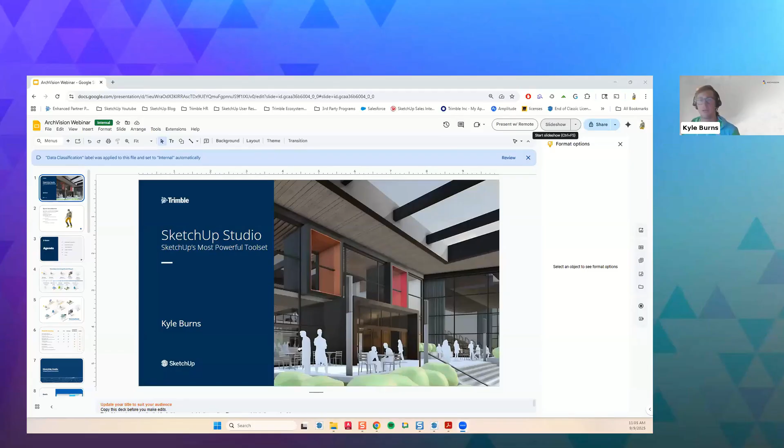Today we are going to talk about SketchUp Studio, SketchUp's most powerful tool set.

Just another quick introduction about myself and why I am speaking to you today. My name is Kyle Burns, and I'm a customer success manager here at SketchUp. I support all of our government customers and our West Coast key accounts, where I am located in Central Oregon. My background is an architectural designer, and I've worked in various firms across the country, including San Francisco and Cincinnati, where I'm originally from, and found my love of historic preservation. Lastly, in Portland, Oregon, where I did a lot of work with the National Park Service, which was super cool and what I studied for my master's. I was fortunate enough to travel to places like Yosemite National Park and do renovations of the cabins and tent villages there, and even design new viewing platforms and pathways for lava tubes and caves in Northern California. As mentioned, I do have a young son. His birthday is actually today, he turns 1, so he's officially a toddler, and I like to get him into the woods and onto the ski slopes to hopefully enjoy the same things that I do, which is why I moved to Central Oregon in the first place.

But enough about me, let's talk about what we're going to go over today. We're going to go briefly over the SketchUp ecosystem and how SketchUp Studio fits into that. SketchUp Studio really includes our SketchUp desktop modeler, SketchUp Pro, with the addition of three valuable extensions: the Revit Importer, Scan Essentials, and Chaos Group's V-Ray. And then we will have a quick Q&A at the end of the session as well.

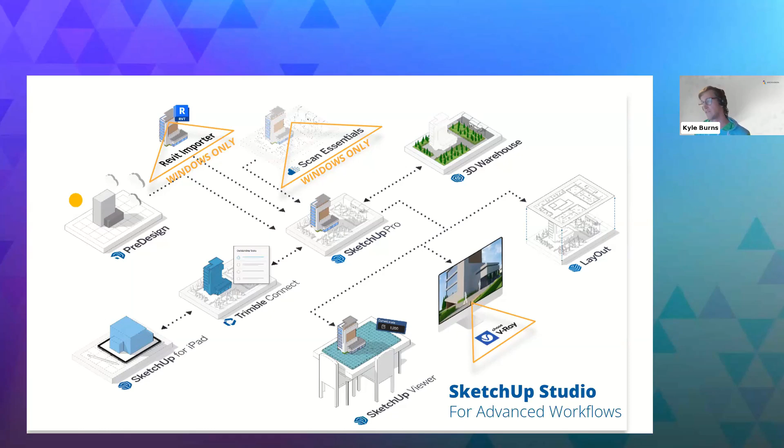It's important that if you're a Mac-only office, Studio may not be the best option for you, but that's why we have some different offerings as well.

So SketchUp has a lot of different subscription tiers. We want to make sure that SketchUp is applicable to any sort of user, those small firms to those large firms as well. We're going to focus on Studio today, which encompasses all of our offerings from SketchUp for Desktop all the way to those 3 extensions.

But there is sort of a middle ground with ProScan and Advanced Workflows. ProScan is going to give you SketchUp plus Scan Essentials, which is that point cloud viewer. Advanced Workflows is going to give you Scan Essentials and the Revit importer. And then Studio is going to give you Revit importer, Scan Essentials, and V-Ray.

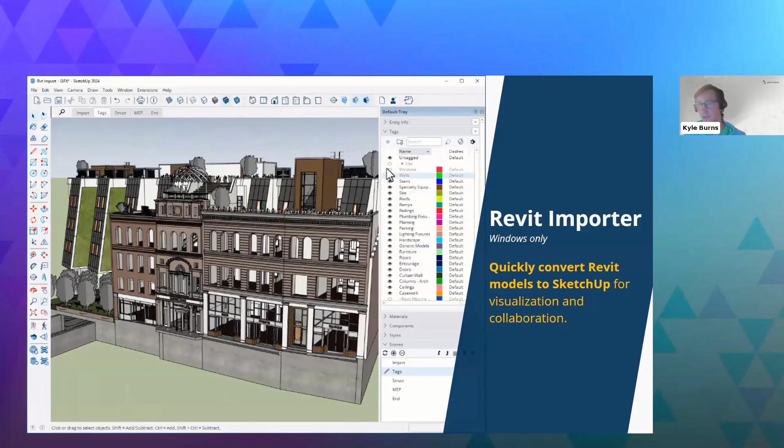So being able to quickly edit and manipulate geometry and organization, it's not going to require any new skills for that SketchUp user to get the Revit information into SketchUp and start generating value from it. So even these really quick animations and orbiting around is pretty difficult to dial in Revit. So putting that into SketchUp just makes that project probably go further in an easier way and getting sort of more eyes on the prize.

I personally think that the more feedback, the more people that are working on a project, it's going to be more successful. If only one person's idea of a project goes through, that's their opinion of a project. We want to engage with the community.

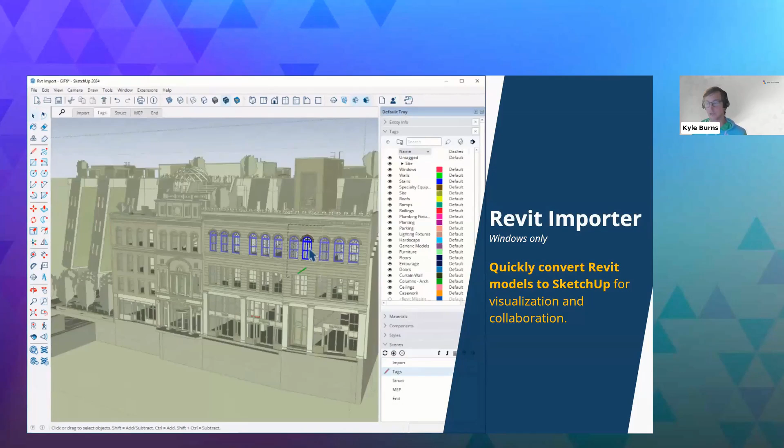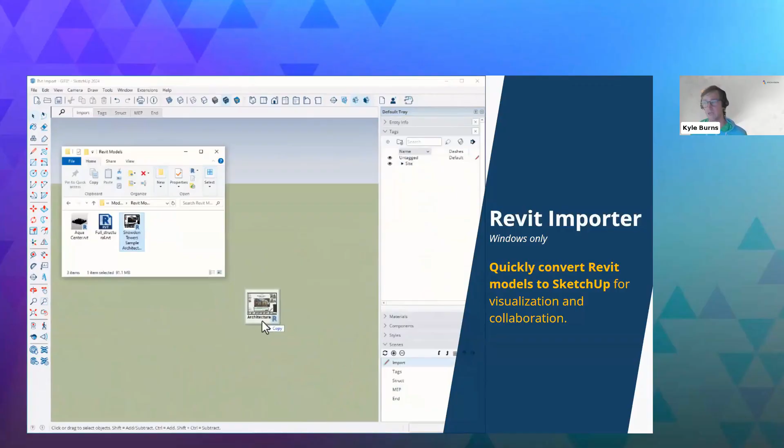We want to engage with shareholders, stakeholders, collaborators at our office, and structural designers, MEP designers, so we can ensure that we have a successful project. If no one is looking at that Revit file because it's a complicated software to use, chances are that's not going to be a very successful project. Maybe the architect has viewed that as a successful project, but if they can't share that with the folks that are occupying that building and give them the opportunity to provide feedback, it's sort of gambling. So I think the more people that can view what's going to be built, the better chance we have of a successful project.

One of the cool use cases of bringing that Revit information into SketchUp is the ability to use our link sharing. This is a new feature within the last year, and if you're not aware of it, it's really cool. It allows us to publish a model to Trimble Connect, which is our cloud component of SketchUp, and share our model with anyone. They do not have to have a SketchUp license, they do not have to be a SketchUp user, and they don't even need to sign into anything.

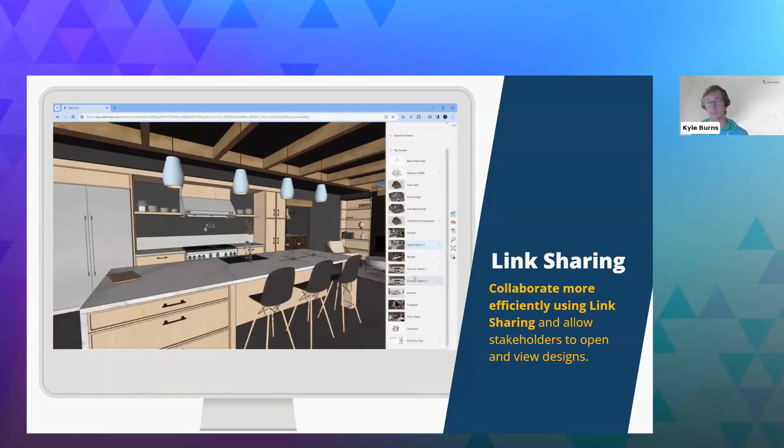This allows us to take that Revit file, put it into SketchUp, publish it to the cloud, and send this out to collaborators so they can ask questions. They can take measurements, they can see views, they can really know everything about that project and not be limited to maybe 3 or 4 images that are typically generated from a model, maybe an entrance and an interior. They can orbit around and really understand the nuance of every part of the building, without requiring someone to have technological expertise to get into that, which I think is really beneficial.

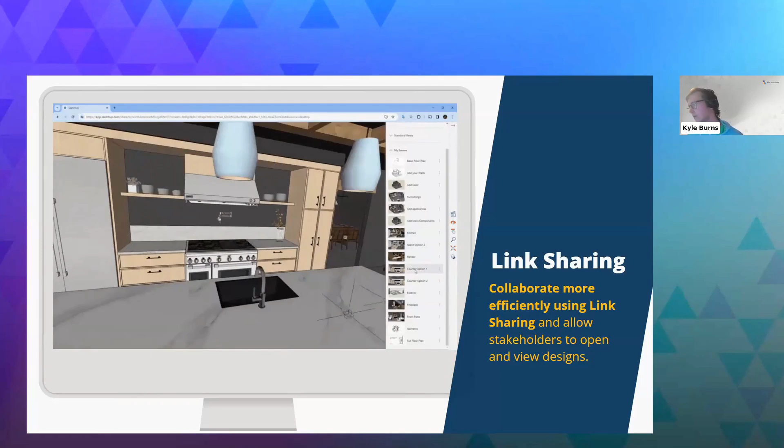There's a lot of great designers out there who may not be the most tech savvy, and saving some scenes and publishing this and sharing a link allows them to skip through and orbit and see all of that great information, ask the right questions, and start to iterate on designs. We'll talk about this again a little later in the demo, which I'm going to jump into right now.

So we're going to break this down into 3 sections: the Revit importer, Scan Essentials, and then V-Ray. Let's talk about the Revit importer first and get into a quick demo here.

I'm going to go ahead and import a file here. Here we are in SketchUp 2025, and importing a Revit file is super, super quick. The bigger the Revit file, the longer it's going to take, but give me a second to get to my quick model here. You can also filter in here - if you just find a Revit file, it will only show you those that are in here. So I'm going to go ahead and import our office in Westminster, Colorado.

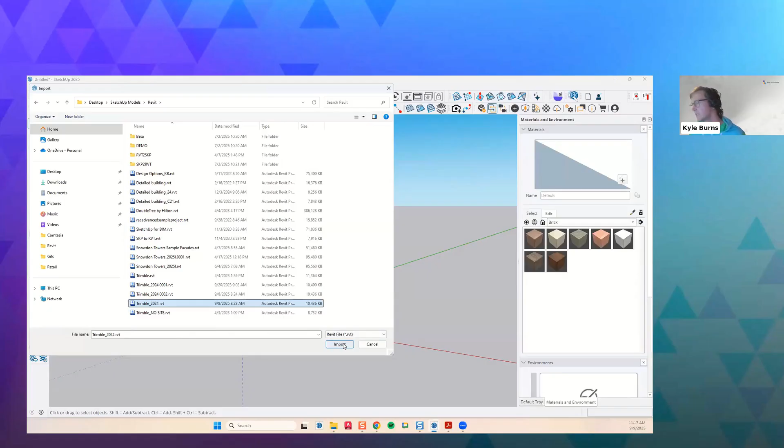The first thing that happens when we select import is it's going to ask you what view you want to import. This is a super simple model, but Revit files, you're likely to have 50 3D views, especially with collaboration - a lot of people are creating different views with view templates. We may want to set this up in a way that we can import the same file each time. In this case, because I'm a Revit user and a SketchUp user, I've actually gone into my Revit file and created a 3D view called SketchUp Export. So every time I import into SketchUp, it's going to respect the visibility and graphics that I've set up in Revit, and it's only going to import what I'm showing in that Revit view. This is really, really important.

We have the ability to bring in any view, and we can delete and change the visibility of the geometry that comes in. But if we can create view templates in Revit, it's just going to make the process a lot easier.

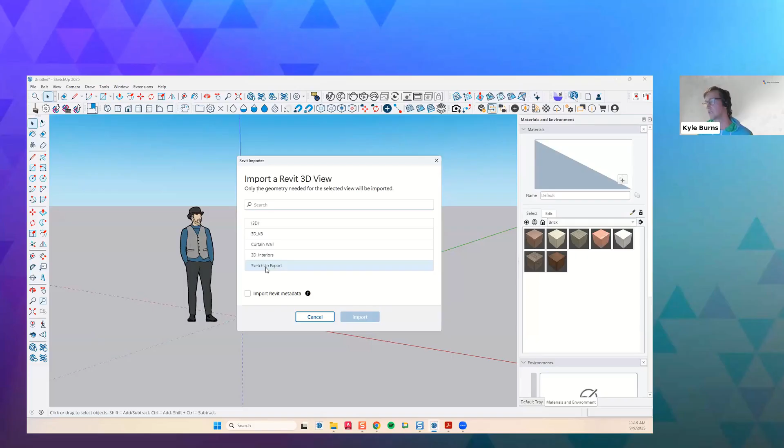So I'm going to go ahead and just click this, and I'm going to import it. Again, this is a very simple model, so chances are you're going to have a much more complicated Revit file. You may not have access to that Revit file to create those views, but no sweat - we can toggle visibility off and even delete things, and it'll start to make our file size a lot smaller. So it's going to tell me my import results, my view, the amount of elements, and that it was successful. And here is my Revit file directly in SketchUp that I can orbit around and start to iterate on.

I just want to go over a couple of the basics of what has just happened when this has come in.

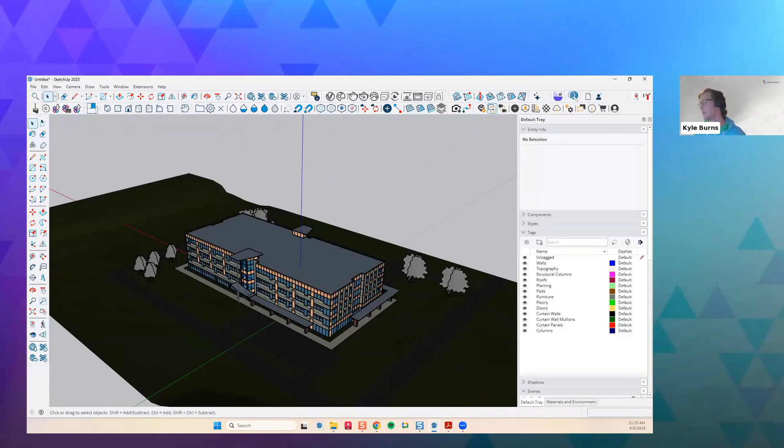Some of the cool things are any Revit family category is automatically converted into a tag. What I like to do is use a tag folder and put this on my Revit import, so I can take everything and throw it into that. If I want to toggle on the visibility like this, I can do that. If I click on a Revit element, let's use this tree for example, we see the tag it's on - this is the Revit family category. If I turn that off, we'll see it turn off. This is curtain walls. If you're using certain families, it will tell you what family it is as well, which is cool. So this is my Revit family, basic wall, generic 4-inch brick. Again, it's on that wall tag.

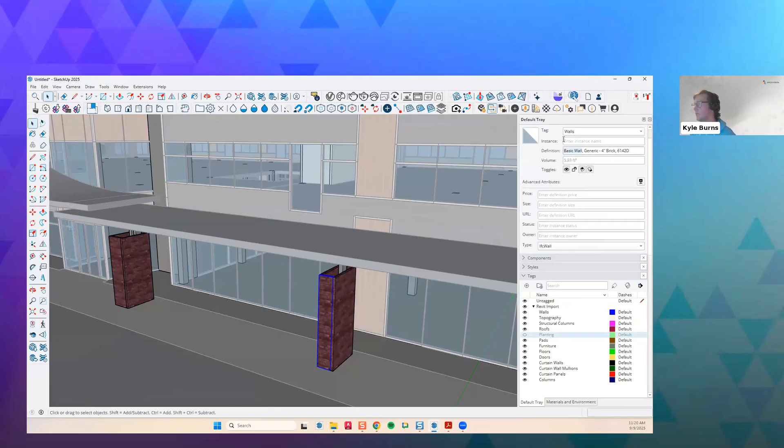So if I needed to do an interior study or something like that, I can turn off my curtain walls, and here's my floors. Again, super simple way of doing this.

In this instance, this is really basic - you see we didn't have anything on the inside done, but this could be a good use case for early stage design or visualization, maybe putting this into V-Ray to get some feedback.

We can really quickly populate this with 3D warehouse information. Of course it wants me to sign in, so let's go ahead and sign in real quick so I can use the 3D warehouse.

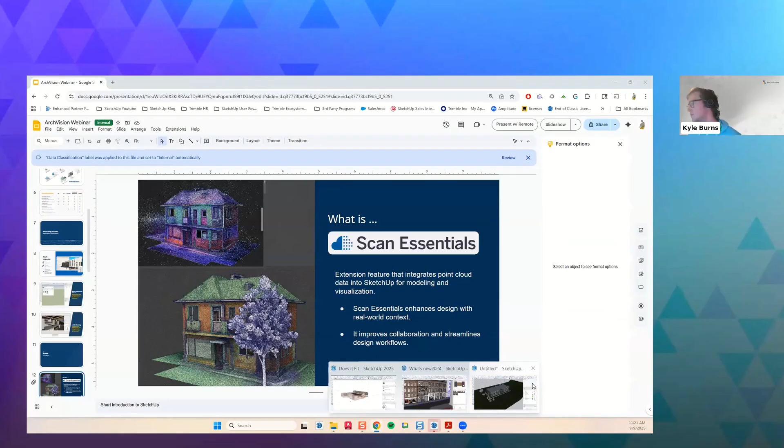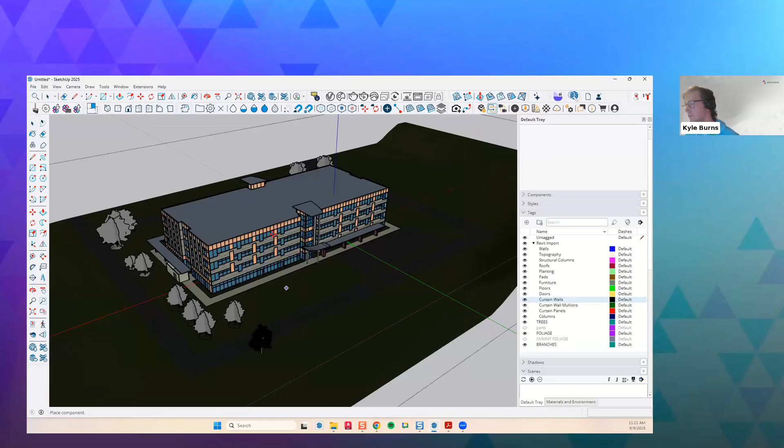One cool thing that I like to do - you notice those SketchUp or Revit trees that came in, not a great tree, it just doesn't really work for what I want to do. So if I download this model and put it over here, what I like to do is actually copy this component. If I edit any component in Revit, it's going to edit all of them. So if I delete that and throw my tree inside of that Revit file, we see all of the SketchUp geometry goes through. There's a couple different ways of messing with components and changing things around, but really quickly I can get rid of that basic Revit geometry and get a little more out of it in SketchUp.

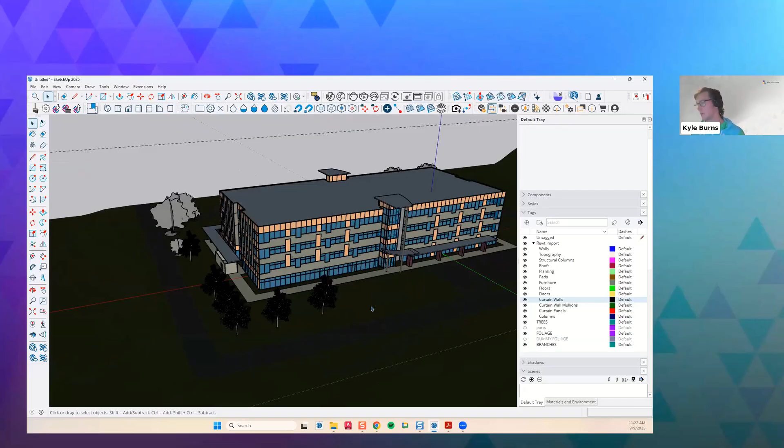This is too basic of a model, I think, to show the value of the Revit importer, but I just wanted to show you really quickly how things come in. So let's jump into a more complex, cooler import.

Because we can add it with SketchUp context, 3D warehouse that I showed a little bit, but we can use add location, we can bring in terrain, we can bring in all of this context. And I think it's awesome.

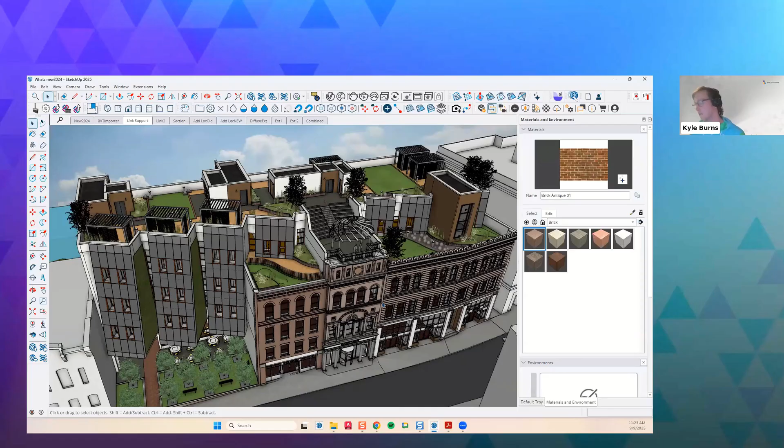So a couple things we're going to show before I show you the finished project of what's possible for a presentation or a fly-through. I want to make sure we see the big picture items - families becoming components, components getting tagged, and sections are actually going to come through and create floor plans.

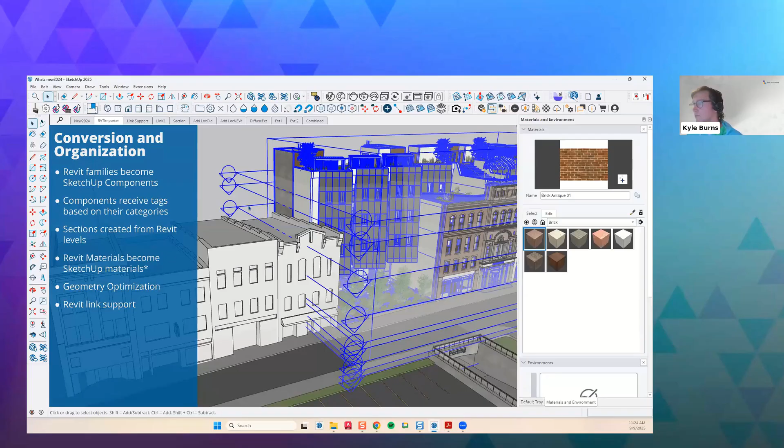Wherever your floor plan levels are in Revit, SketchUp makes those into sections, which is pretty awesome. So in this case, let's say I go in and turn on my section planes. Each one of these section planes is a Revit floor plan that has been set up. So if I want to do some sort of interior iteration, some workspace design, interior layout, if I click here and say active cut, and let's go back and turn off my section planes - this is exactly where the cut in our floor plan was going to be.

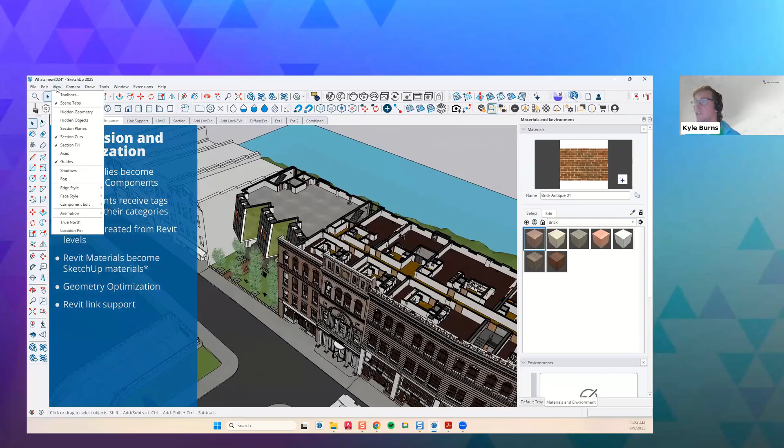I wanted to make sure we see that it's capturing a lot of that data from Revit - this is called L4, it's level 4, and this cut is exactly where it's going to be taken out of in Revit. So everything comes in as a solid, so we see the poche that's in here. This can be changed in colors. We see the interior layout of these spaces. This could be a good use case where maybe we're unsure of the layout of these spaces.

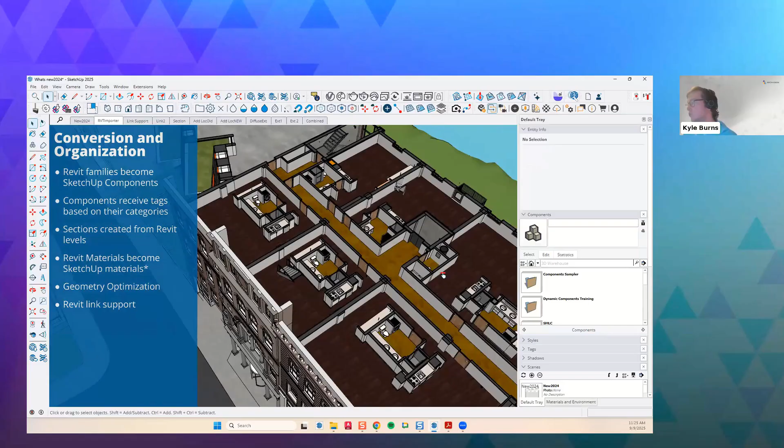Doing a quick iteration within SketchUp rather than doing it to each one of these units in Revit gets feedback very quickly without worrying about losing annotation or dimensions or messing up another part of the Revit file that someone else is using because we're using central files and work sharing. We can take stuff from the 3D Warehouse and start to generate quick concepts, save them, get some feedback without worrying if we're messing with what's going on in that Revit file.

So this is super helpful, I think, to really generate interiors. Not all interior projects are going to be working in Revit. So if we've got a Revit file from an architect and I'm an interior designer, I don't need to be forced into working in Revit. I can take their file, come in here and do all of my interiors, do my material studies, my furniture layout, even my egress or code compliance, start to run square footages of materials and create budgets and stuff like that, which is pretty cool.

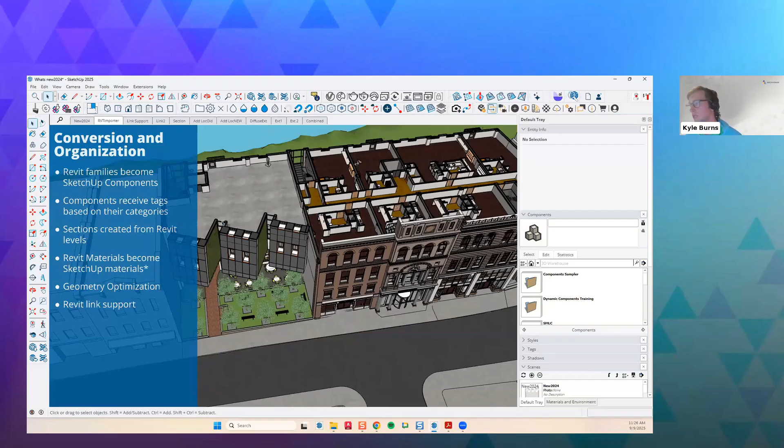Another great thing that the SketchUp Revit importer does is it respects links. Revit projects will typically have a linked structural file, a linked electrical file, maybe even a linked civil or landscape file, and those can come in as well. So we can maybe see problematic instances that are hard to capture in Revit. If we want to hide our ductwork and things like that, those links will come in as a proxy and we can reload them, which I'm not going to do in this case, but I just want to make sure you know that we can bring in all of the information from a Revit file.

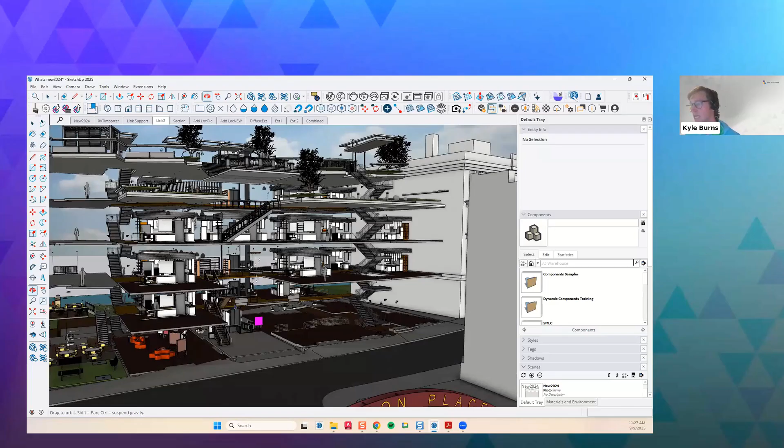This is just a view showing the external walls taken away and how easy it is to maneuver around in here and maybe have a discussion with the lighting designer, knowing we might need some dropped ceilings or something to hide ductwork, to hide conduit. It's pretty difficult to orbit around and do this seamlessly in Revit, but we can just get into SketchUp, ask the questions, make quick changes.

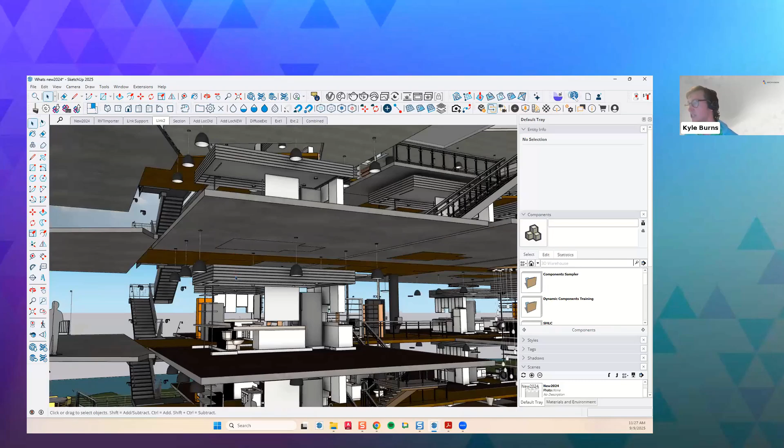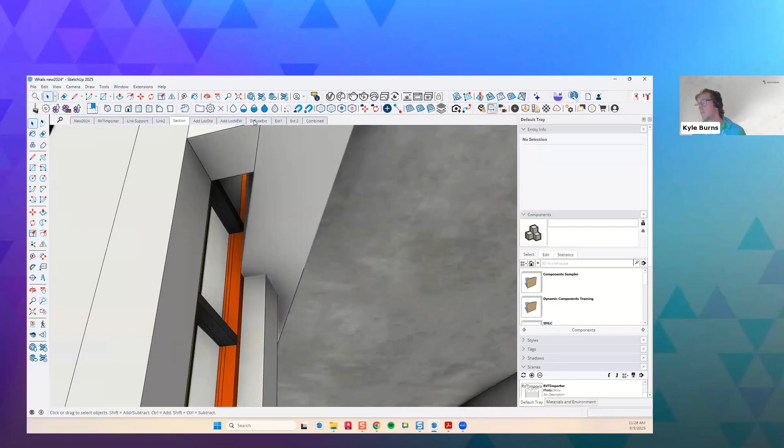Generating sections is really, really useful too. In this case, we're not showing any lighting or ductwork or heating in here, but something inevitably is going to need to go in here, and we can even look at possible issues that may arise. Like this case, a pretty complicated detail - that's something that's going to cause an issue in the field. It's going to be very difficult to find a view in Revit that shows that. So importing this into SketchUp really quickly, knowing this is an issue and being able to solve those issues is really, really helpful. So let's get into how we can combine all of this.

So we've got a Revit file that we brought in, but we want to do some presentations. We want to do some fly-throughs. We want to get the client excited about our project. Doing that in Revit isn't really great, so I've gone in and used our Add Location feature to bring in context.

I have gone into the 3D Warehouse and actually found an existing bridge that I've placed in here, and we've gone and just masked out adjacent structures as well. That just helps with the context of everything. So as I orbit around, we can focus on the building here, but also view it from further away and maybe ask some bigger picture questions.

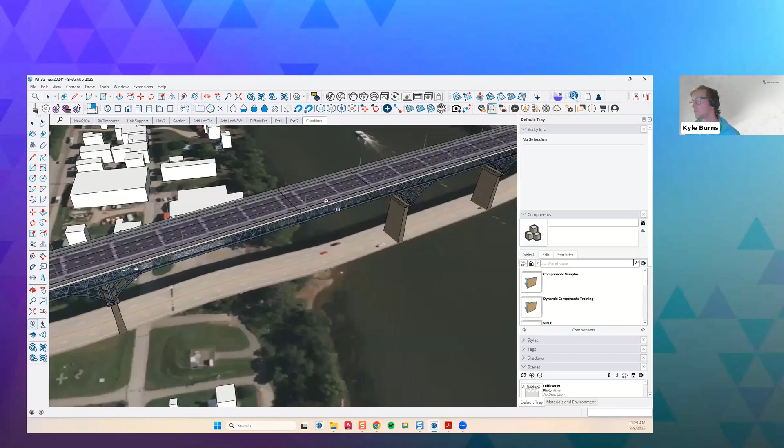Maybe we want to see that this building is cool and interesting while we're coming into the city. We can generate this view, talk to the owner, see if they want to make any changes, see if they're happy with this. Maybe this is a potential to create a really cool facade here, maybe some sort of mural or art piece that can go in. That sort of question is hard to ask if we're just staying in Revit.

Another thing we may see as an opportunity here: we've got this great asset of the river adjacent to it, but we only have a few units that have a balcony. As an owner or developer, you can see immediately that the more balconies we have on this project, probably the higher we can charge tenants for these units. So maybe seeing this, the owner is now thinking maybe we want to change the unit count, put some higher end residential units in here so they can take advantage of that adjacent river.

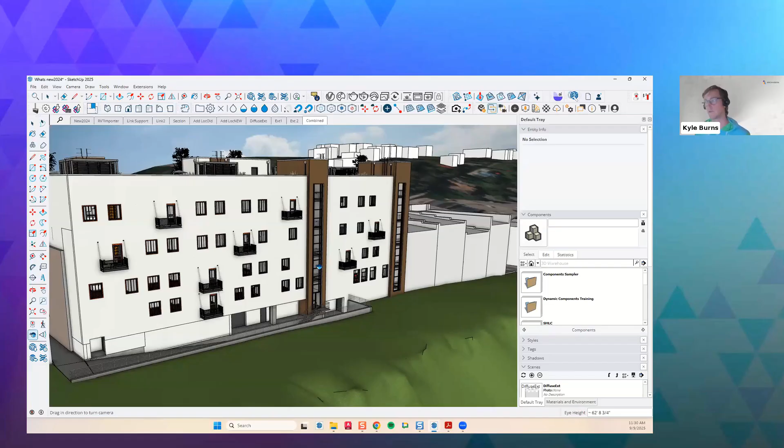They want views, they want to be outside, they want to barbecue, something like that. Let's add a few more balconies in here. We could quickly do that, and add things without going into Revit. Just real quick, do we want to add them here, or move them up here? A quick design iteration is super valuable.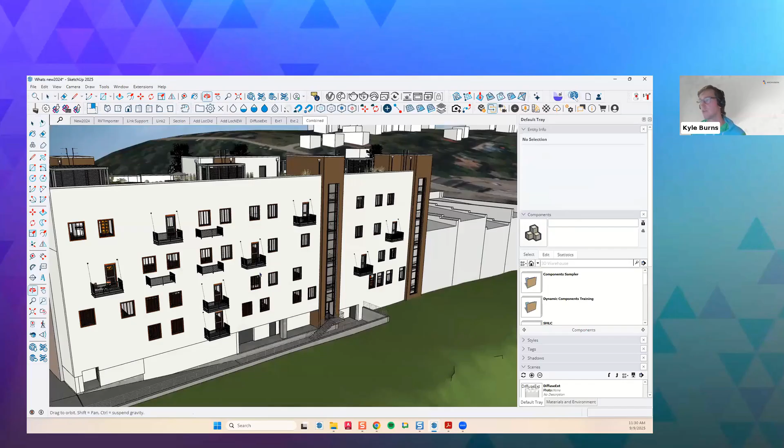Another thing I wanted to show is the ability to adjust textures. So those Revit textures will come in, like this brick, all of this comes in. Doing material studies in Revit with design options is definitely a pain. While it's possible, it's harder to do because it takes a lot of time and effort to set up.

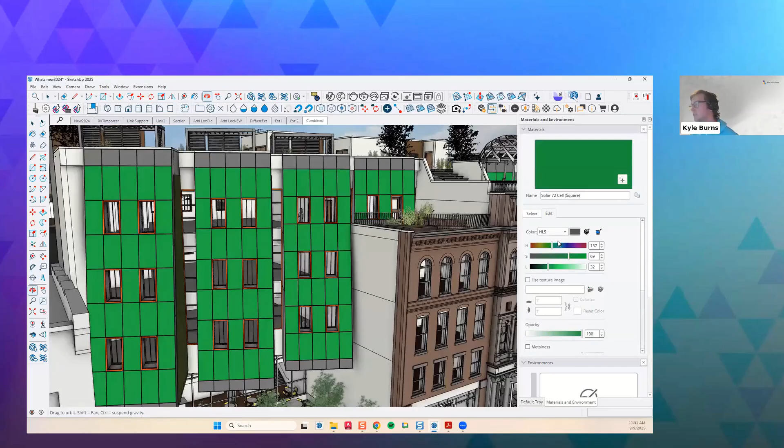But if we want to do a quick study of different colors of this facade, it's very easy to sample that facade and play with the colors a little bit. You can change this to a different texture. I think this is really valuable, especially for me living in Oregon—whenever I see a gray facade, it's gray a lot here. So why would I want a gray facade if I have the opportunity to make something a little more interesting? And in this project, there's a historical element.

So maybe we want to pay a little respect to this brickwork and get to a color that fits a little better—still a contemporary look, but fitting in with that fabric a bit. We can present this super quickly to the owner, or maybe we need a custom color from the manufacturer of this curtain wall. We can dial in the RGB and make sure exactly what we're looking at gets built correctly.

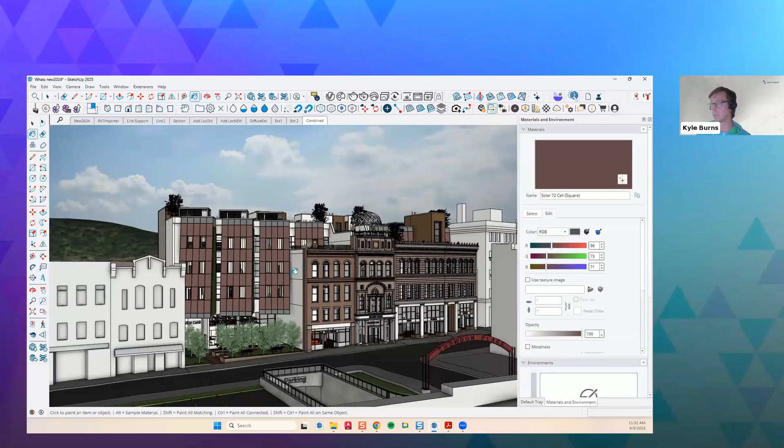Another cool part, pushing the limits of what's possible when we import this into SketchUp: with all SketchUp subscriptions, we have SketchUp Diffusion, our AI image generator. If you haven't played with AI in your design process, just know it's coming—it's not going to take our jobs. It's a new tool that can help with production, image generation, and iteration, and it's really cool. Don't fight it. Welcome it, use it, try to figure out how it can push our designs further.

SketchUp Diffusion will take anything in our SketchUp window and generate an image from it. This is an auto prompt that comes in here. I'm not going to mess with anything, but there are different ways to create images—different styles, funkier or more artistic versions. I'll generate this so you can see what comes out. This won't replace the need for something like V-Ray or Enscape for a photorealistic deliverable, but it can help suss out different ideas for material studies.

Or if there are keywords that are really important to the owner or developer that they want to use, we can type that in and have AI give us an interpretation of what that means in our project.

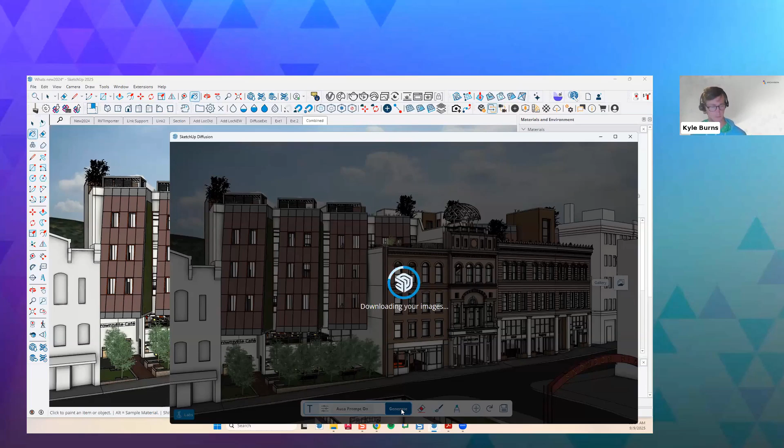And if it doesn't go, maybe we try one more time—change the view a little, zoom in. If it still doesn't go, we'll move on to Scan Essentials.

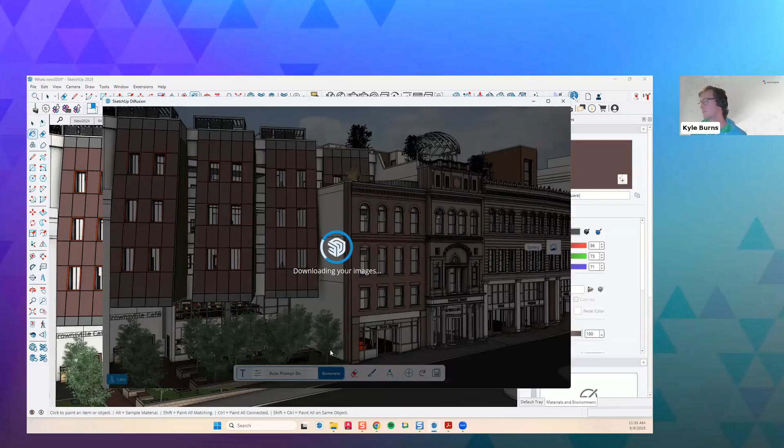Kyle, while you're doing that, go ahead. Cool, you go. Sorry.

Yeah, go ahead, Corey. I was just going to ask you, where do folks get access to SketchUp Diffusion? Is that part of Studio? It's part of every subscription we have, so it's even included on the iPad, which is really, really cool. I'll show you how to get access to that right after this.

So, Fantastic, you can see that quick image that came in, looks pretty good to me. This is, we have the ability to change the skies, change the material, things like that. Type in, let AI do its thing. Pretty cool, I definitely recommend playing with it.

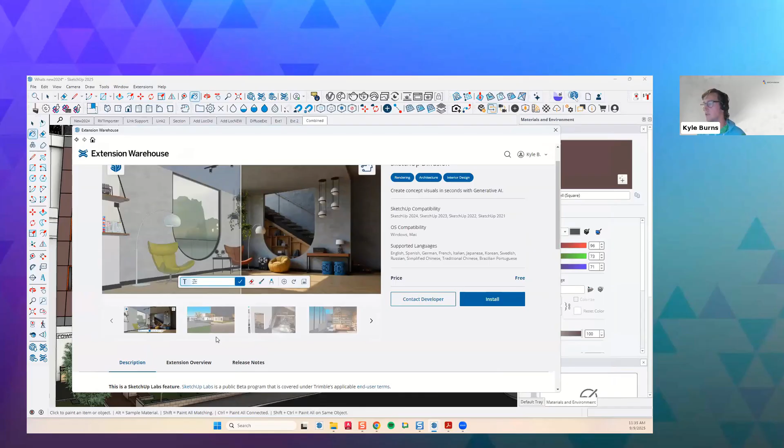If you want to get to it, it is in our extension warehouse, and if you search for it, it's called Diffusion. It'll give you a little walkthrough of what it is. You can see that SketchUp model, that finished model in an interior, sort of what's possible.

Really, really cool. Again, it is in public beta, so if you use it, please give us feedback. We want to make sure that we are creating tools that are valuable for its users. If we've got it and it's not solving any problems, it's not valuable to you, it's not valuable for us. So please try it out, go crazy, have fun.

It's really, really cool, and it doesn't need to be something detailed either. It could be just a massing concept, really early stage design iteration, super valuable. It'll create different patterns of curtain walls. There's a lot of different toggles to change shapes if you want the prompt to change more, or if you want the geometry to have more power over what we're seeing. It'll even do image generation for your scans or a sketch that you brought in.

It does not need to be SketchUp geometry. So if you've got a really creative and funky design principal that likes to hand draw, and you have to interpret that into something real, just import that image and run diffusion on it and see what AI thinks of that principal's crazy sketch.

It's pretty cool, and you can set it up as a background. You can do a lot of stuff. So if you didn't know you have it and you're an active subscriber, you have it. Download it and get to diffusing. Super, super cool.

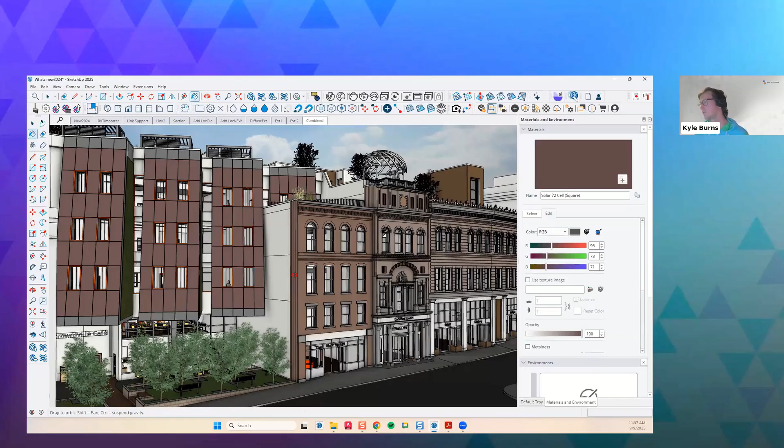So with that, I'm gonna leave us with the Revit importer, but I did want to show one last thing, just to showcase that if we do change one component, it will change everything, and I think this is helpful.

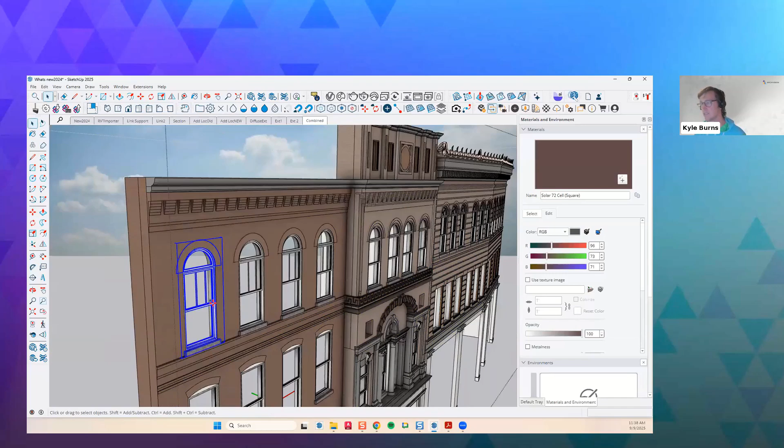Maybe in this facade we wanted to add additional panes or something in this window. If we go and do something like this, we see that it changed all of them. So manipulating families in Revit is definitely a science, it's a difficult thing to do, but adding stuff in SketchUp is super, super quick.

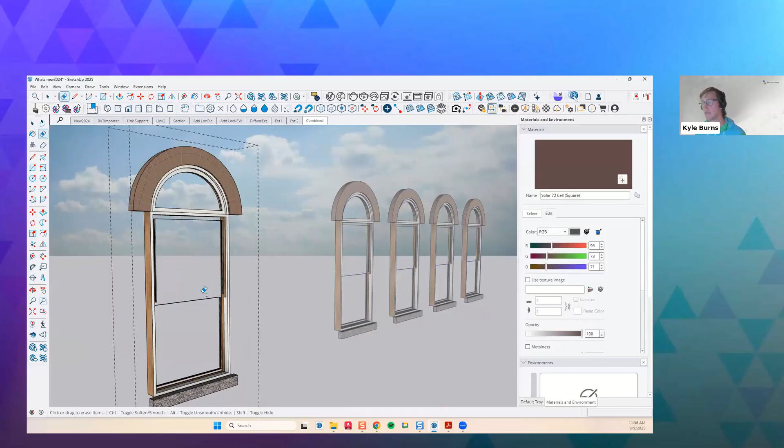We can decide if we want additional panes, or if this wants to be a more contemporary look where something is actually fully deleted. Again, we don't have to worry about what impacts that has in our Revit file. This is just for visualization, and maybe we like this more open look versus the divided style here. It's just for different interpretation and different iteration.

So I'm going to get out of this Revit file and let's talk Scan Essentials. Let's get back into here. All right, so Scan Essentials is an extension that integrates point cloud data into SketchUp. This is really, really cool.

Point clouds are becoming more common in workflows, especially for complex projects, complex sites, renovations of old buildings. When I did historic preservation, I was going into 120-year-old buildings with a tape measure and a laser measure, and would have to go back to that building 10 times because the measurements just weren't adding up.

If I had the ability to take a point cloud and put it into my file and start to model on top of it, it would have saved me so much time. The great thing is scans aren't the cheapest thing in the world, so we're getting a lot more value out of these point cloud scans. They can come from terrestrial scanners, drone scans, even new iPhones and new iPads have scanners in them.

You can scan rooms, you can scan objects, bring them into SketchUp. And again, it's all with this goal of improving collaboration, so more eyes on the prize, again, successful projects.

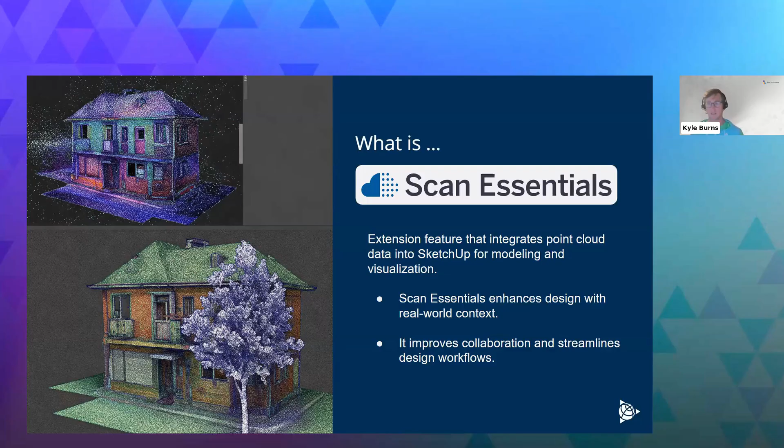This is just a quick GIF showing a scan coming in and the SketchUp tools being used on top of it. All of the SketchUp tools will snap to the point cloud. We can take measurements and make super precise models from point clouds.

But a lot of the point clouds are such good resolution and clarity that we may not need to model all of that stuff. It may just be for an interior layout or maybe a rehabilitation of a certain part of a building. We don't need to model everything. We can kind of ghost in that point cloud, and we'll talk about that again in the demo that's coming up.

This is just a quick idea of the workflow. We've got a scan here of an existing building, a complex historic building with a lot of information. Maybe it's hard to measure all of this stuff. Not all buildings are easy to get access to, but if we can scan them, it's a lot safer to get that data.

It's not always about buildings either. It could be large sites, it could be infrastructure. We have customers who take point cloud scans of areas affected by disaster. Maybe it's unsafe to go into a building due to an earthquake or a fire, but they want to help move that project along, or the renovation or safe dismantling of a building. They can scan that and have a game plan about how to get everybody out there safe, rather than going in with a tape measure or something like that.

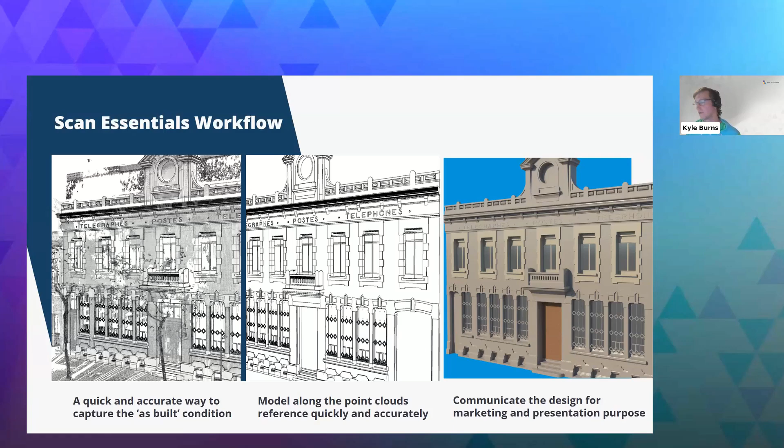So this example is maybe an old building that has been condemned, but we are renovating it. We're putting new structure in it. We can take that point cloud file, make a SketchUp model, share that with the structural engineers, and coordinate the best way to bring this building back to life, and even render it out and communicate the design intent. So essentially 3 steps: capture the data with a scanner, model and iterate, and then with all things SketchUp, share it with people for feedback to ensure that the project is successful.

There are a lot of different use cases. Scanners are in all sorts of different workflows and environments. I talked about renovation and historic preservation. Before and after is a cool use case. Site conditions and operation and maintenance of existing assets is really helpful. And spatial feasibility - maybe we're owners looking at a variety of buildings that are potential places for us to buy and renovate. We can scan them, see if our ideas will work out in SketchUp, and be able to pursue certain buildings that we think will work for us, or just say, nope, that's not going to work because we scanned it and put some stuff in it.

So let's jump into a quick demo again and look at some of these options. So here is a scan. I'm going to go over a few buildings so we can hopefully make sense of this.

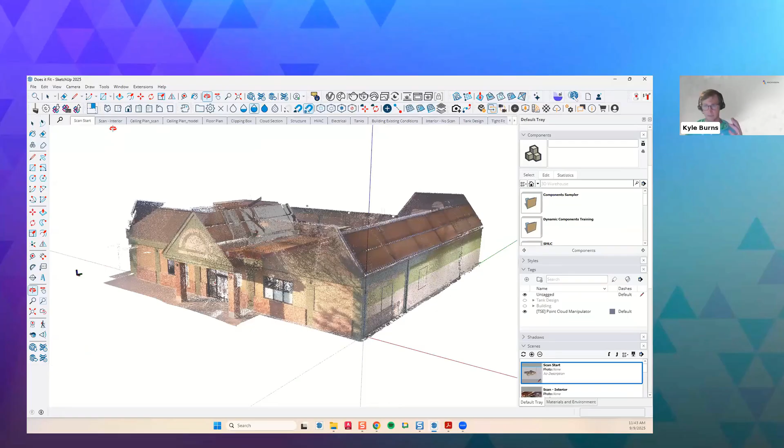This is a scan that was brought in via a terrestrial scanner, so that's a scanner on a tripod. As we orbit around, we see all of the data that's in here. Here's our interior scan - none of this is modeled, this is just an interior scan of this building.

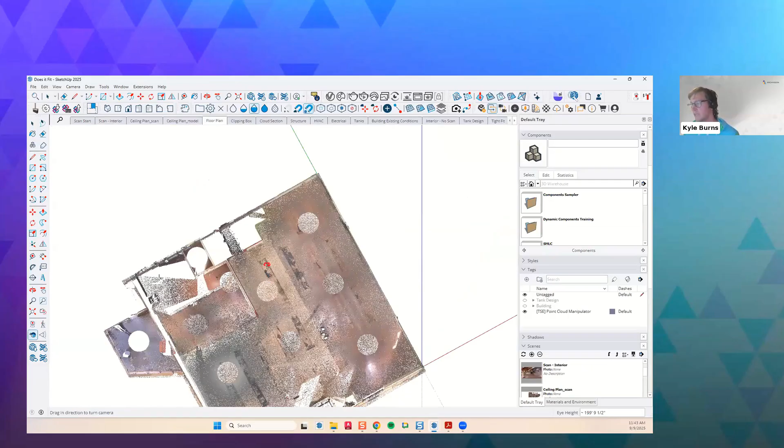We see these circles here - if we look on the floor plan, this is where those scanners were coming in and capturing the data. If I orbit around, we see that it respects our SketchUp sections. And if I wanted to take quick measurements, like maybe the spacing of this column, we can snap to 2 points and get a quick idea of the spacing, which again is really, really helpful.

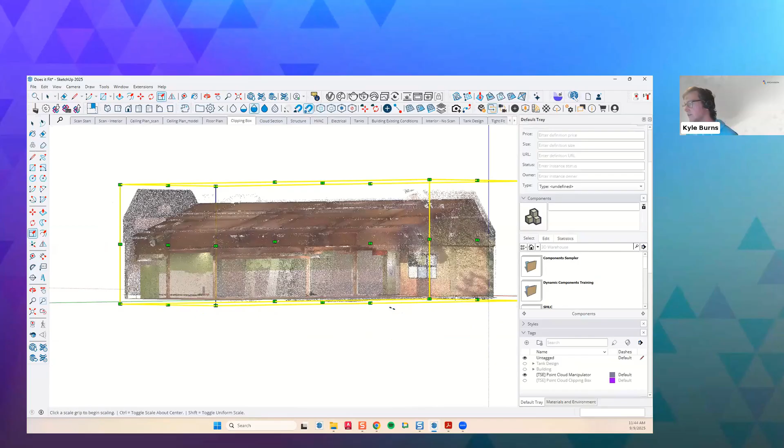There's a lot of different ways to view this. We can create clipping boxes, which is really helpful. This allows us to focus on our scope of work. So if we're only focused on this area over here, we can quickly clip that, essentially giving a section box, and we can see the inside of our building super detailed.

And this is our toolbar before I get too crazy in here. So a lot of different ways to see the model - opacities, point size if we took a bad quality scan, different ways to see colors or scanning stations. If it's a terrain, you can see via elevation, which is helpful. The next example I'll show will be that.

And let's keep it on the photorealistic one. I want to just skip through a couple scenes here and talk about this.

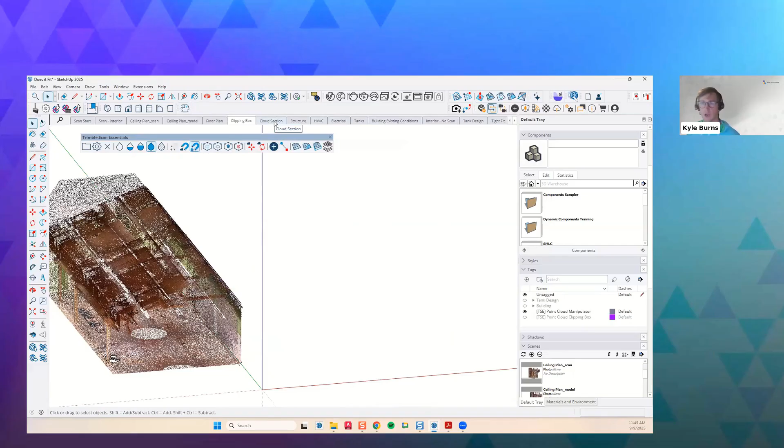So in this example, maybe we want to renovate this building with new systems. It's an old building that we want to renovate, so it needs new HVAC, it needs new lighting. We can click to each point and actually model things on top of this.

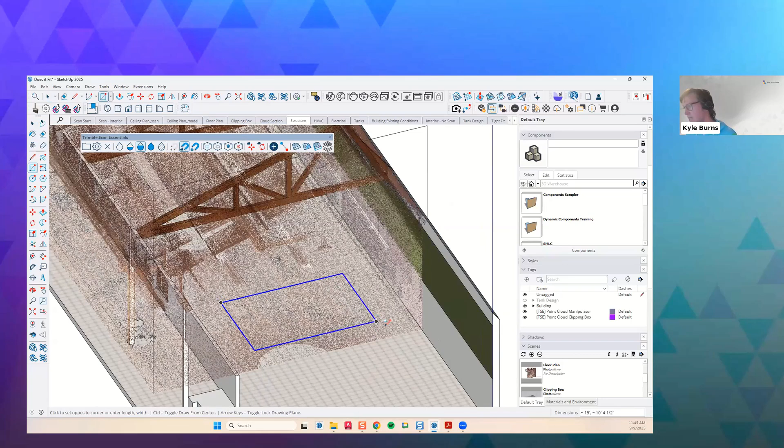So if I turn my scan back on, there's a way to select: point cloud pick versus SketchUp pick. If I click on point cloud, you see that it's trying to snap to these points. So I can come in here and make sure that this is creating a surface directly on that point cloud, which is how I went in and created the structure.

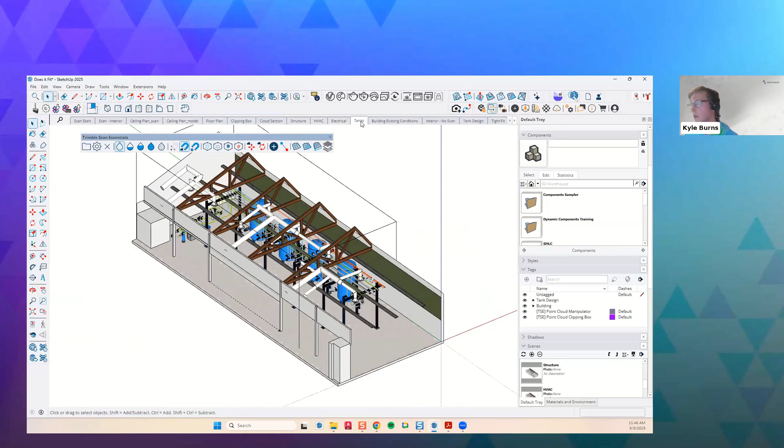And then I went and started to implement new HVAC. I can orbit around. I've even got the existing electrical in here. And then I can see if maybe my new use is worthwhile. So I've gone in and went into the 3D warehouse and found some information here that I need to renovate this.

This idea, maybe in this day and age, it's a cool new brewery or something, and we need to make sure that all of the tanks and all of the equipment can fit into this. We know the system that we're using, but we have some pretty important elements in here, like this interesting truss that really can't be moved. So are we going to run into problems with some sort of system? Because of that, we've modeled out all of the existing conditions before we put in our new tanks.

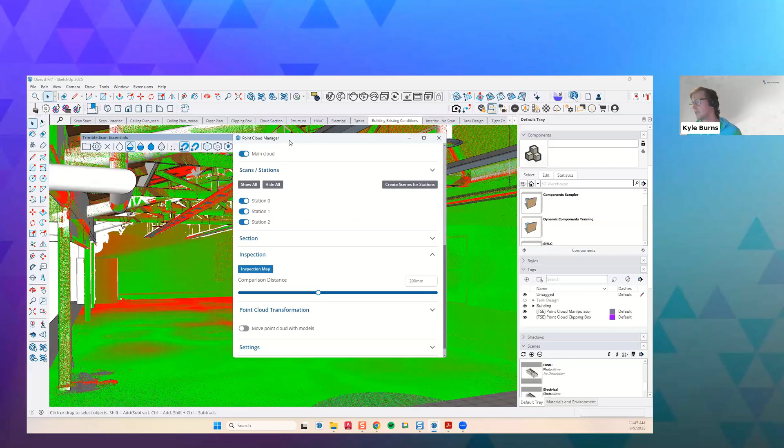One great feature of Scan Essentials is the ability to verify information via inspection map. So what this does is it tells me everything that I have modeled. Again, if I turn off my scan, this is everything I've modeled directly off of the point cloud. I've got them in here sort of transposed on each other. But if I do my inspection map, everything in green tells me that I've modeled within 100 millimeters of accuracy, and things in red are not as accurate. So 100 millimeters is a very small threshold, and this tells me that this is all modeled accurate enough, and then I can start to do my studies.

So I've got value out of that point cloud, and I may no longer need it anymore. And then I move into my, no scan, put in my tank design, and I can orbit around and see if there are any issues. Of course, there are some issues. We've got a tight fit here. Is this tolerance going to be able to work for these existing conditions?

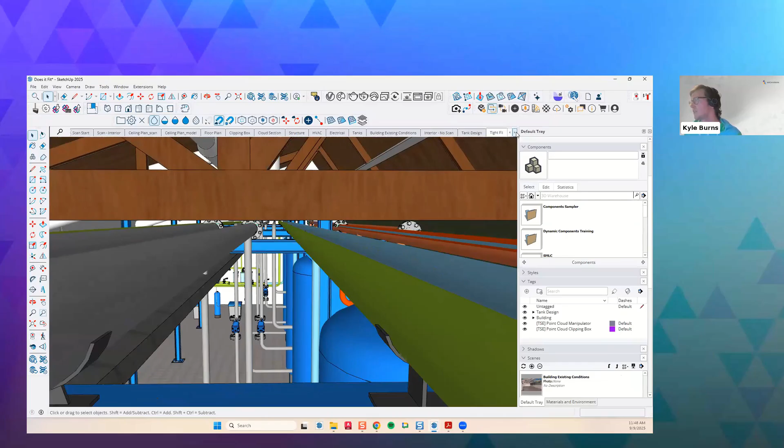And setting up sort of clash detection. So we've got pipe that's going to go through this light. We're probably going to get rid of this light. Again, is this more important to have this old tray lighting? Probably going to get rid of it, but we know those problems before we get in and building it.

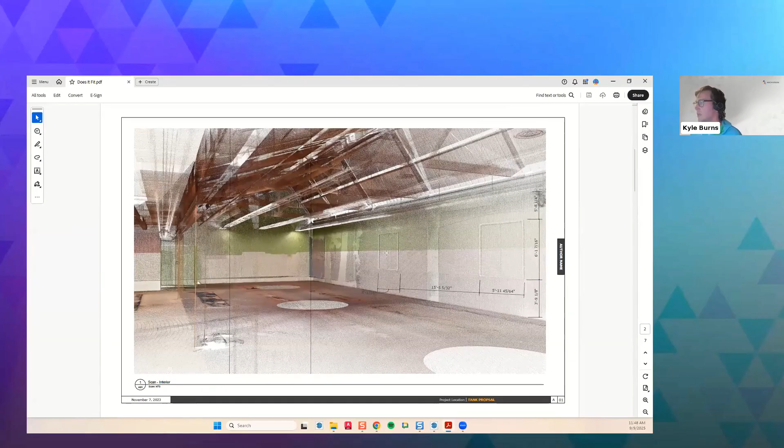Cool part of this too is it does push out to LayOut. So I can create as-built documentation from this point cloud, even really without modeling anything. And so I've got a PDF here that I've created in LayOut, which is our paper space component of SketchUp. We can see our interior scan. We can even shoot dimensions here of our existing windows. And we get a floor plan and a ceiling plan to better understand the asset and sort of before and after. So I've got a section here, transverse section and a longitudinal section, and then of my design that I'm going to put in here.

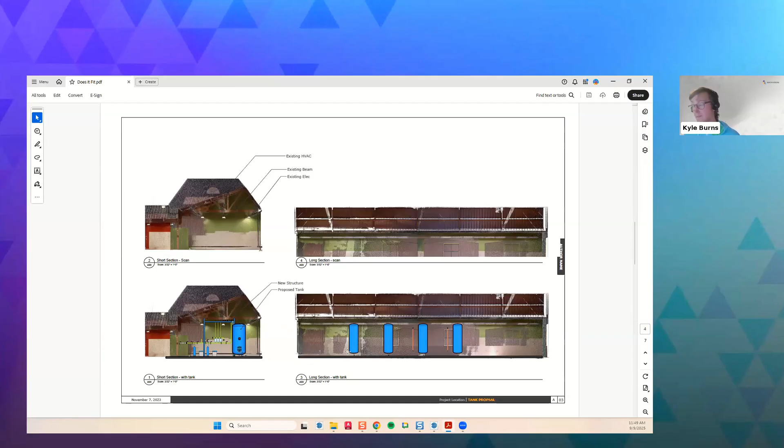So is this going to work? And I can get feedback really without doing much modeling at all. And setting up views like I showed of the basic structure, when we're going to add in HVAC, and getting scaled drawings out of that scan without really doing much, I think is super helpful.

And then a cool way of putting that all on top of each other. So this could be another use case for CA as well. If we're taking scans throughout the project and making sure that things were built as designed, we can take a scan of the building, overlap it with our design model, and ensure that things were installed correctly so we can make sure that project is on budget, on schedule, and is going to be successful for the tenant to move in at the time that we hoped they would move in.

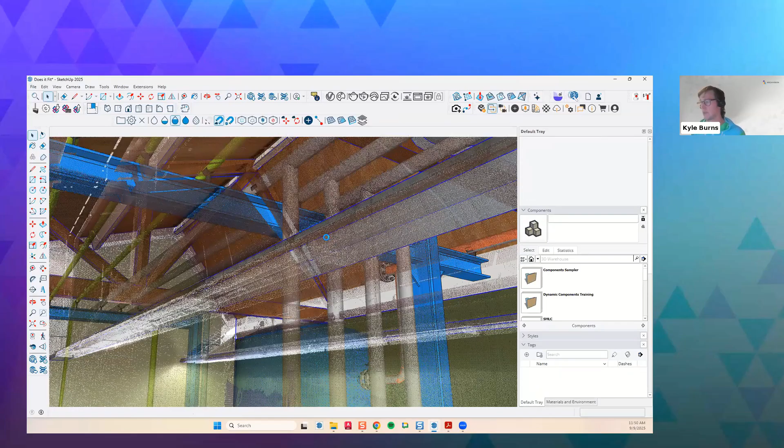So I want to get into one more example of a scan that's maybe not a building that I think is super beneficial to look at. And this would be of a site, a fresh site. So let's go into this guy. We're not going to save this. We're going to open up this scan, which is a drone scan, which is pretty cool.

I'm going to unload the current cloud, make sure we put in our new point cloud. And you can see how fast it loads in a point cloud file. It just took a second. And this is our point cloud here. So this has a clipping box on it. Make sure I turn it off.

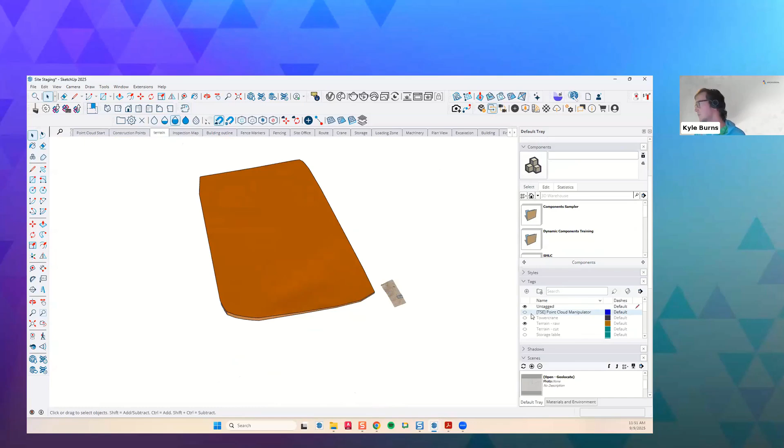Where is that guy? There we go, there it is. It's over here. Cool. So one of the great use cases of this is to actually generate terrain. For some reason this clipping box is not showing, so I may need to open up a different file. Let's open up a different file and hope this one works better. For some reason it's not finding the correct point cloud. Let's try one more, and then I may move on to a GIF of it. It's not working for me.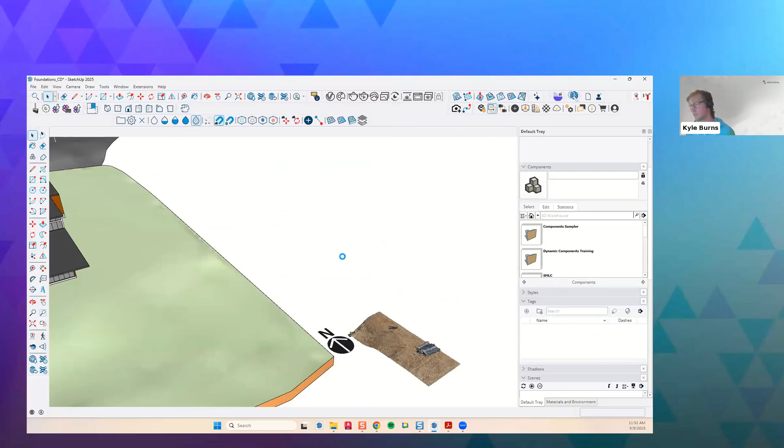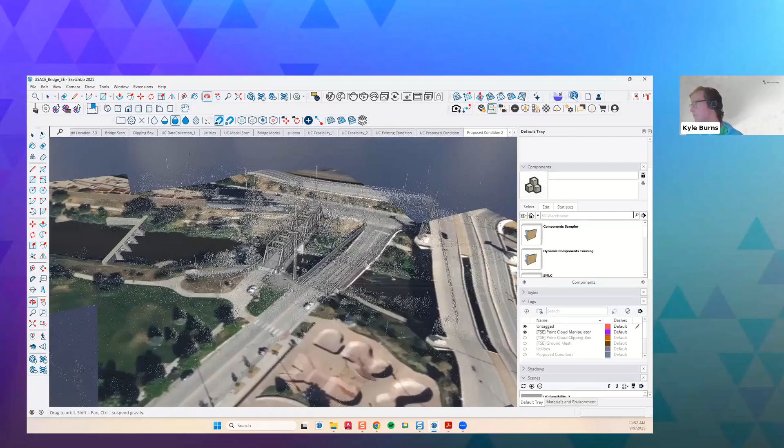The tool I wanted to show is that you have the ability to auto-generate terrain from this point cloud. So if you do have a complex terrain, really with the click of a button, you can get SketchUp geometry from it, which is super helpful for cut and fill, for site staging, a lot of different opportunities. In this case, we can see our point cloud again over top of some context that's been generated here, an instance of maybe a before and after sort of thing.

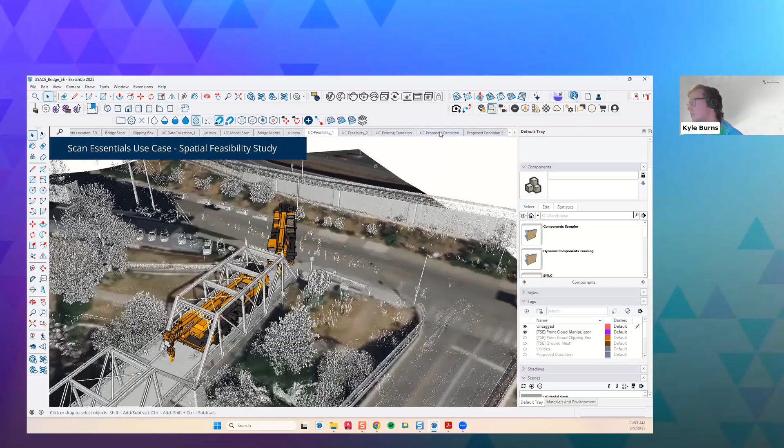We can study utilities. These are really hard things to capture and get value from. And as we orbit around, not all buildings, this could be a complex landscape. There's a lot of pathways and things that we need to take into account. And we can do feasibility studies too. So if we do have a complex site that we need to get certain machinery to, we can ensure that we can get the machinery there to have a successful project. So a lot of different feasibility.

Before and after studies, I think, are super helpful. So if we've got two potential designs, we can see which one will work the best. Hopefully this is showing the potential of what's possible with these point clouds.

Since we're running low on time, I do want to make sure that I get to V-Ray as well. If you are using point clouds, I highly recommend taking a look at SketchUp Studio, because bringing those point clouds into SketchUp really is super valuable. It's just so easy to manipulate and get more use out of that data that you've worked so hard to capture.

Because the most up-to-date data is going to be from that point cloud scan that you took last week. Those existing drawings or aerial imagery or things like that, there's always the opportunity to get wrong or misleading information. And if you can capture a point cloud and bring it in, it's great. It will import in 5 or 6 different file types - E57, LAS, TZF, PLY - again, from your drone scan, from your personal scanner, from a high grade terrestrial scanner, all of those will come into SketchUp.

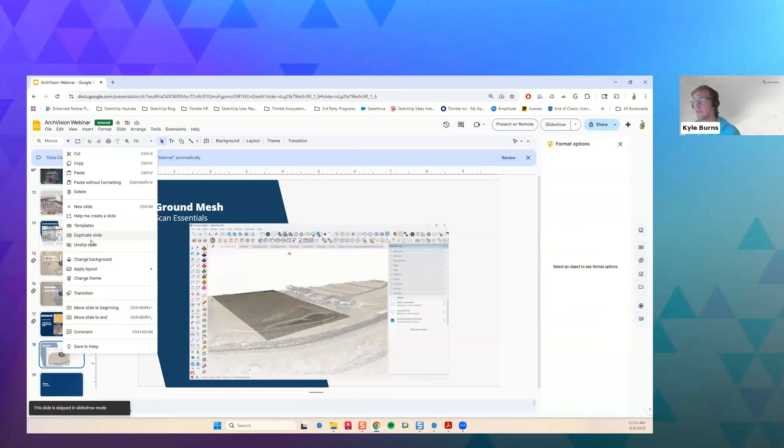Actually, this is great - I have an animation of that. Unfortunately that image wasn't shown. So this is that drone scan. And if I were to make a rectangle over an area that I wanted to automatically generate terrain from, I just click that face, say generate terrain, figure out the amount of detail that I want on that terrain, and boom, I will have my terrain.

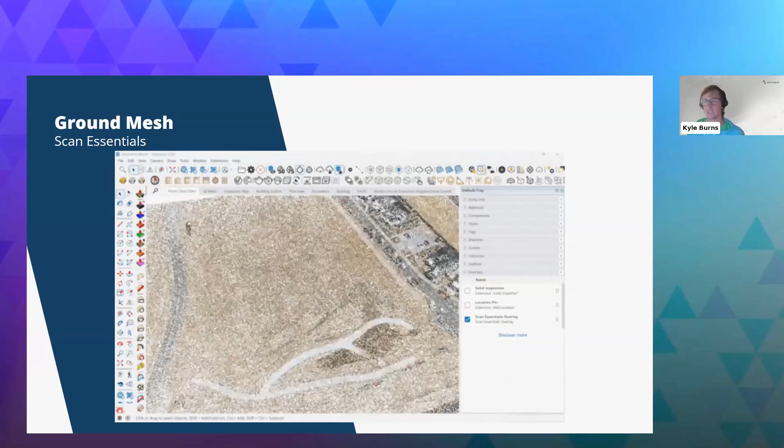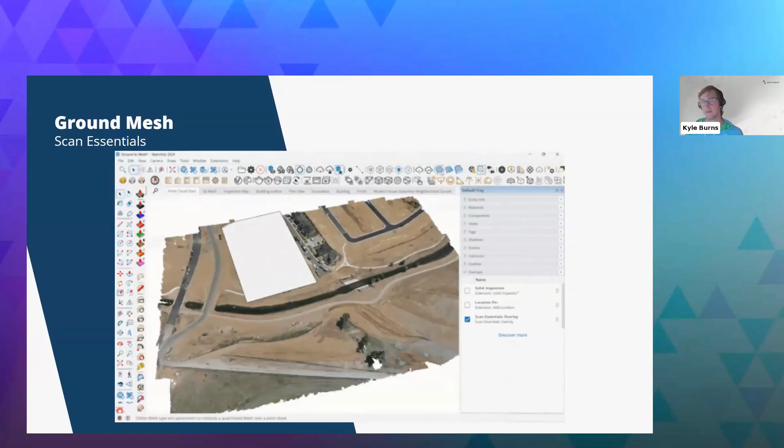So it can be super detailed for cut and fills, for site staging, any of that stuff that we really need to visualize, maybe not a building, but the logistics of a site. A lot of big contractors are using this to ensure that they are placing the site office in a great place, that they can get materials onto the site, really that game plan that they can take the architect or designer's intent and build it correctly in a speedy and respectful manner.

Last but not least, we're going to talk quickly about V-Ray. I'm not going to demo V-Ray because it's such a powerful visualization software that if you are interested in V-Ray, I highly recommend that you look into the resources that Chaos Group has created. V-Ray is a third-party tool developed by Chaos Group, and we've partnered with them to ensure that we put it into SketchUp Studio to deliver the most powerful and impactful subscription for our users.

V-Ray is really the tippy top of it, of what's possible when it comes to photorealism. I've just, because I can't demo all of this, a quick video of what's possible. You can really dial in the details. If you've got a plane in SketchUp with a grass texture, V-Ray knows to populate that with blades of grass. There's just so many possibilities and really interesting use cases for V-Ray.

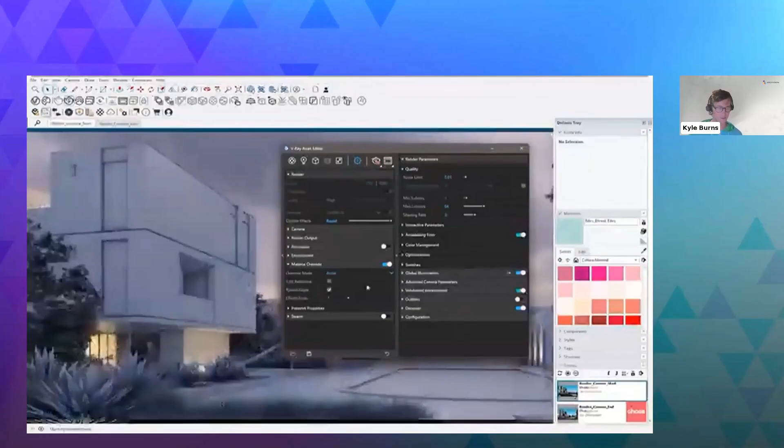It's extremely impressive if you want to get to this level of visualization. A lot of times this level of deliverable is maybe not necessary for an architectural project. It usually comes a little later down the road for that next project pursuit or proposal of what's possible. So really useful for RFPs, really good for marketing potential.

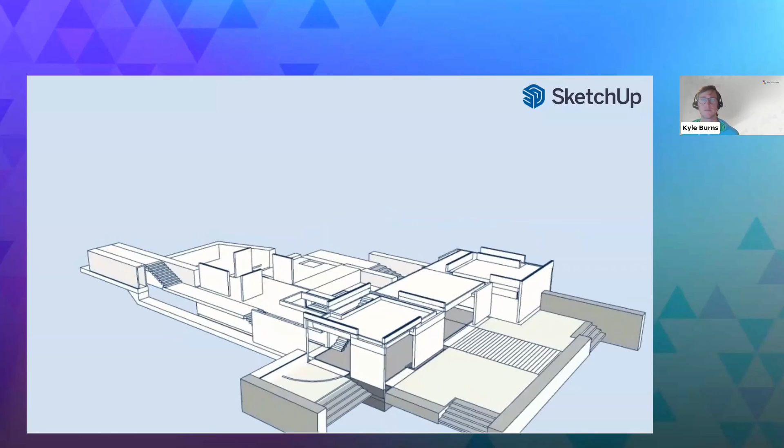If you're trying to sell out a tenant space in the first floor of a commercial building, you can show maybe a retailer or a restaurant what's possible, make a couple quick SketchUp iterations and share that with a coming soon and what's possible, and share that idea with someone who may not be able to interpret that themselves. The last thing I'm going to leave you with before we leave a couple minutes for Q&A is all of this in

one sort of process, right? So the first part of this animation showed that SketchUp diffusion, where maybe we're doing some material studies. Do we want this simple structure to be wood? Do we want it to be concrete? Real quick and dirty iteration.

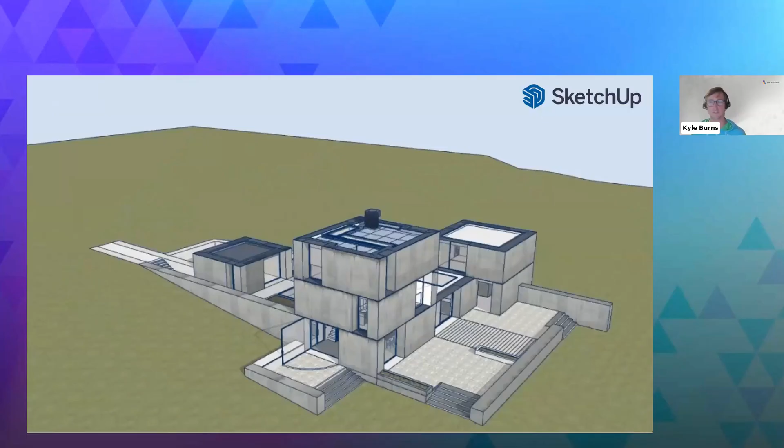And then we're bringing in Revit and consultant models into SketchUp's environment. We can create fly-throughs and animations to really fully understand the systems that are going to be built, to get any sort of problems out of the way, to really visualize every aspect of it, but in a more interesting way than 2D documentation. And then populating this with V-Ray assets to get a photorealistic render.

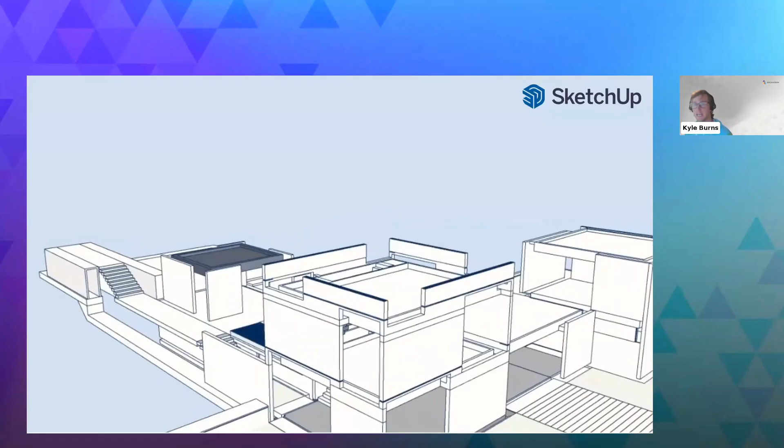So this is just to reiterate that SketchUp from the start, the first part of programming a building, to the finished coordination in CA, and those awesome photorealistic images possible with V-Ray, SketchUp is used throughout the entire project, not just that conceptual and schematic design. It's the coordination, it's the iteration, it's the presentation to the owners, to the stakeholders, to the developers, to really get trust in why they hired you in the first place to design something.

That transparency that you're continuing to work with them, that everything is on schedule, that we're working back and forth with those collaborators. Using SketchUp at every phase of the project is really, really valuable.

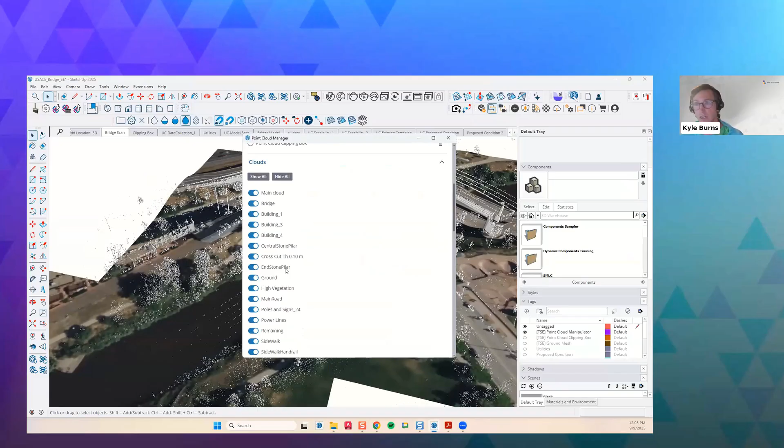If I go into the point cloud manager, the way you register the point cloud - I'm not positive on different scanning software for the iPad, but for a terrestrial scanner, like a Trimble scanner, you can segment it and say you want certain information on a certain layer, and you have the ability to toggle that information off here. So if you wanted to toggle off the vegetation, you'd need to register that in a different software, and then you could turn it off in these instances. All of this gives you a little more control, but that's up to the person doing the scan to make sure it works correctly.

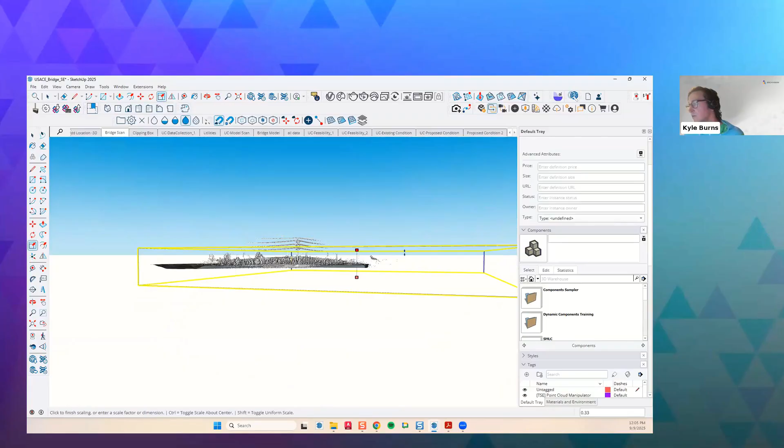That's where the clipping box and section tools really come into play, because you can get a clipping box and start to quickly crop things out. Like if I didn't need the power lines, but someone didn't set this up in a way - if I clip that out, which is because I've got two of these on, if I activate this one, it'll clip out everything above it. So there are some controls in there for sure.

There's also a visualization here to do it via station. So if you had different scanners, you'd have a little more control - like this station is giving off a green color. I'm never the one who takes the scans, so I don't fully understand how this stuff gets registered. That's why we're just trying to get more value out of the scan data, especially if you're getting it from a third party or a collaborator. We can visualize things directly on top of that.

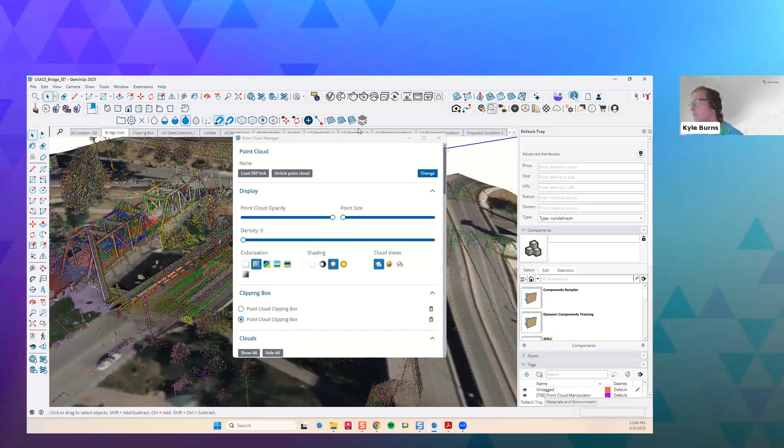Great question though. Cool, anything else? I think we're good - Debbie, you want to close up?